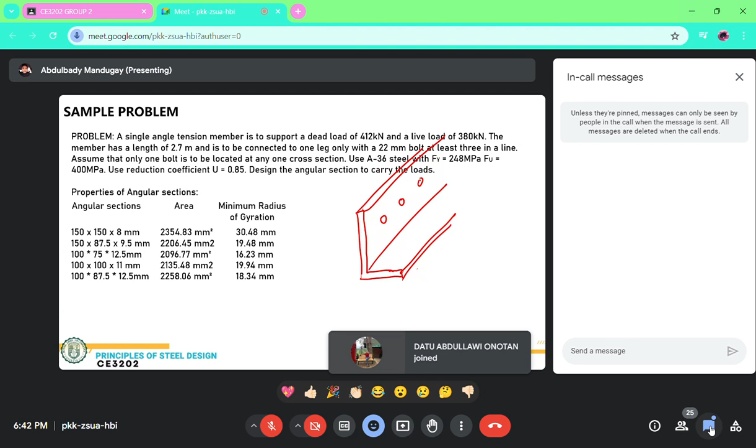With one leg, to one leg only with a 22 mm diameter bolt, at least 3 in a line. Okay, so this is one line, at least 3. So pwedeng 4, pwedeng 5, depende sa atin. Assume that only one bolt is to be located at any one cross-section. So ibig sabihin sa one of the two legs niya lang.

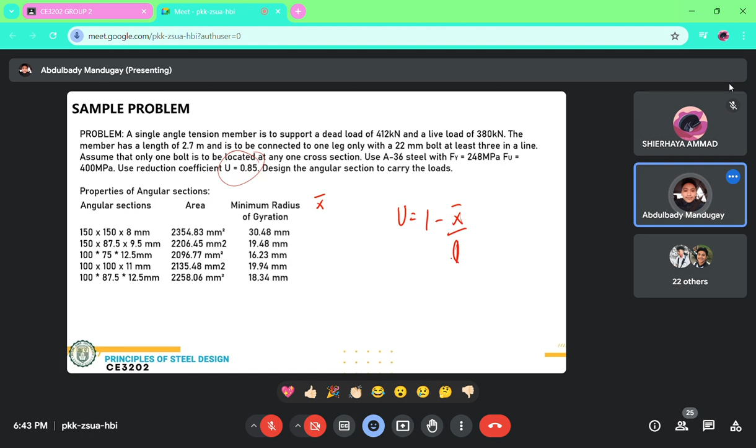Okay, design the angular section to carry the loads. Now, meron tayong choices dito. May different sections. These are all angles. And given ang area nila and given din ang minimum radius of gyration nila. Now, ang task natin is to design the section. Pipili tayo ng section na sufficient mag-carry doon sa given na load.

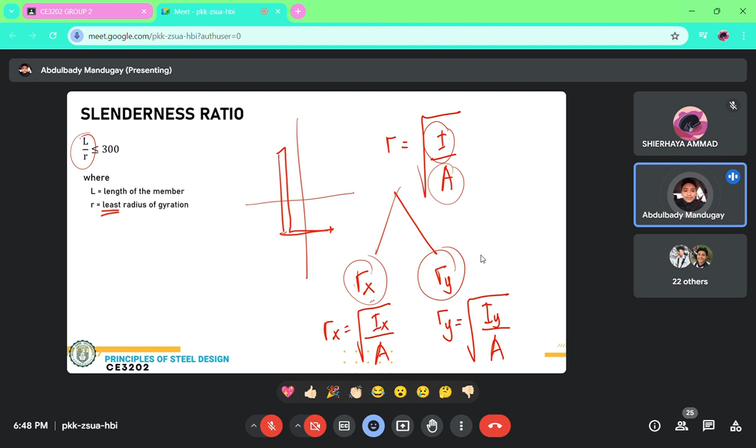So kung radius of gyration about X, this is actually square root of inertia natin about X all over the cross-sectional area. At si radius of gyration natin about Y, this is moment of inertia about Y divided by cross-sectional area. Now, the smaller of the two values, yun yung gagamitin natin dito para malaman natin kung ano yung tinatawag nating critical slenderness ratio, which is dapat hindi siya maglagpas sa 300.

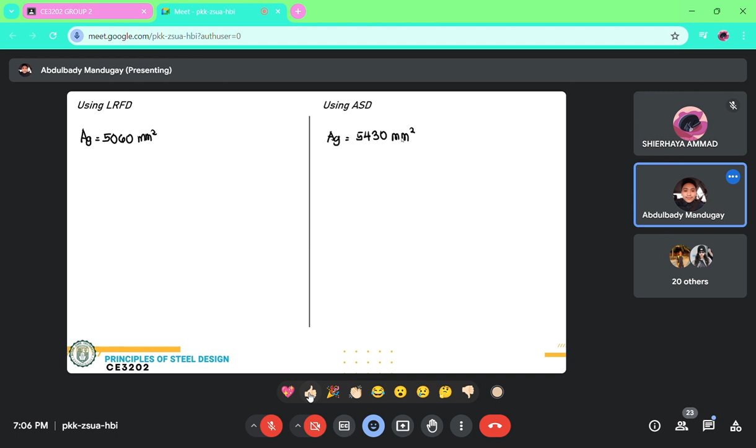So, since ang sabi sa problem is to be connected to one leg only with a 22 mm bolt. Okay, alisin na lang natin yung given na U. Total, nandito na tayo. Para isahan na. Sige. Kunyari walang U, anong gagawin natin? Ang sabi dito is angle siya to be connected on one leg only. So, ibig sabihin, let's say for example, napili natin na leg is the longer leg. Nandito nakakonect yung bolts. Dito siya nakafasten.

So, pagdating sa shear lag factor, if you can still recall, mag-fail na to sa case number 1. Kasi dapat sa case 1 is nakakonect sa lahat ng sections. Sa case 2, pasok siya kasi fastened lang siya on some but not all. Pero may isa pa siyang case kung saan siya pwedeng pasok. That is case number ito. Okay. Pasok siya sa case number 2, which is by formula na 1 minus barred x over L, at pasok din siya dito sa case number 8.

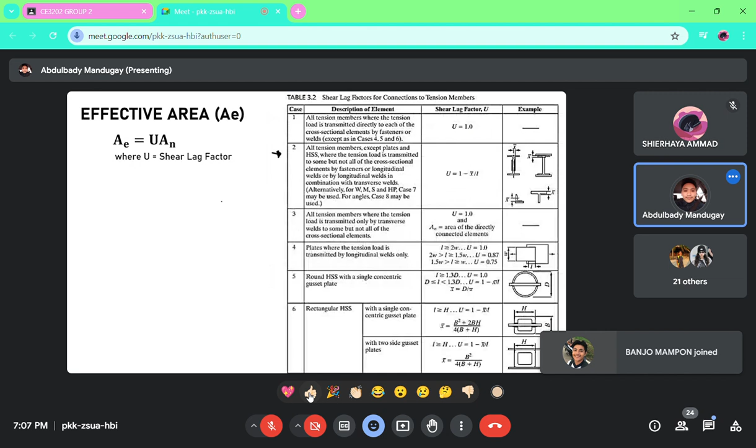So single and double angles, okay, so single angle ito siya, with 4 or more fasteners per line, ang gagamitin natin is 0.8. With 3 fasteners per line, 0.6. Eh, ilang fastener ba to? At least 3. So, pwedeng 3 or more. Okay? So, kung 3 fasteners per line, ang gagamitin natin na U is 0.6, from case number 8.

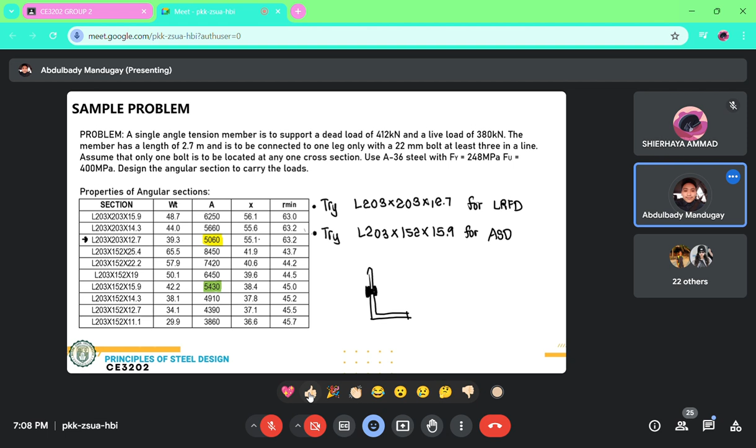But, if ang gagamitin natin is case number 2, isasolve natin yung ating magiging shear lag factor using 1 minus barred x over L. So, ano yung barred x natin? Since ang napili nating section for LRFD is this one, ang barred x natin is 55.1. At ang L natin is wala pa tayong value. Ngayon, for our L, pipili tayo ng spacing. Kung babalikan natin, may spacing tayo na requirements of bolts. Okay, wait lang. Kunin natin ulit.

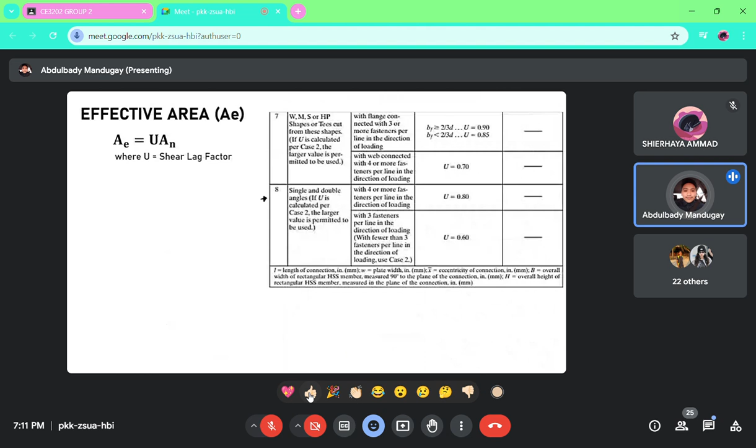Pero since design topic ito siya, free kayo na i-apply kung ano yung gusto nyong specifications. As long as nakasunod kayo sa code na not less than 2 2/3 of the nominal diameter ng bolt, then pwede. Pwede kayong mag 2 2/3 D. Pero 3D is preferred according to the code. So, highly encouraged na 3D kasi mas madali siyang isolve. Yung 2 and 2/3, halos 3 naman din siya. So, 3 times nominal diameter ng bolt. Ang nominal diameter ng bolt natin is 22 mm. So, 22 times 3, that's going to be 66.

Okay. So, preferable lang yung 66. Pero sa actual, 66, masyadong sabog. In mm to siya. So, pwede natin gawing 70 para sarado. Or kung naka-inches siya, pwede ring saradong value ng inches. So, let's just say 70 mm. Again, we are designing. So, may freedom kayo as long as you are considering yung safety, practicality, pati yung aesthetics.

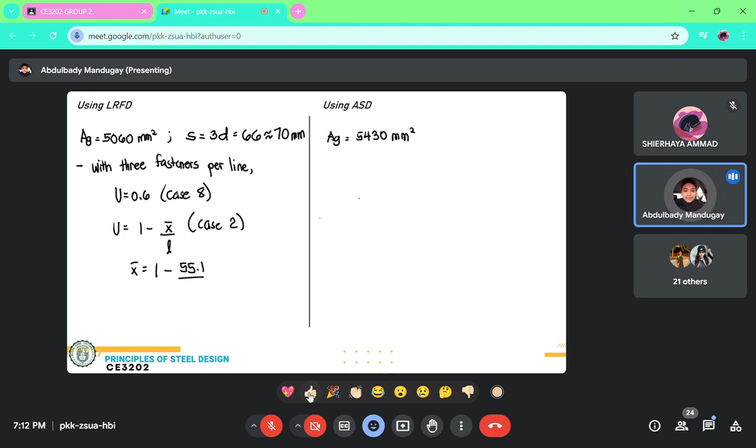Okay, so 70 mm. Kung 70 mm yan, 3 fasteners per line, meaning, kung ito yung longitudinal view ng ating angle, 3 fastener yan. So, kung 3 fastener, that will be dalawang 70. So that's 140. This will be our L value. So divided by 140, that's 0.606 or 0.61. So if meron tayong dalawang value ng U, sabi sa code is piliin kung ano yung mas malaking value. Pero same lang sila halos, di ba? So itong pipiliin natin. Ang magiging U natin is 0.61.

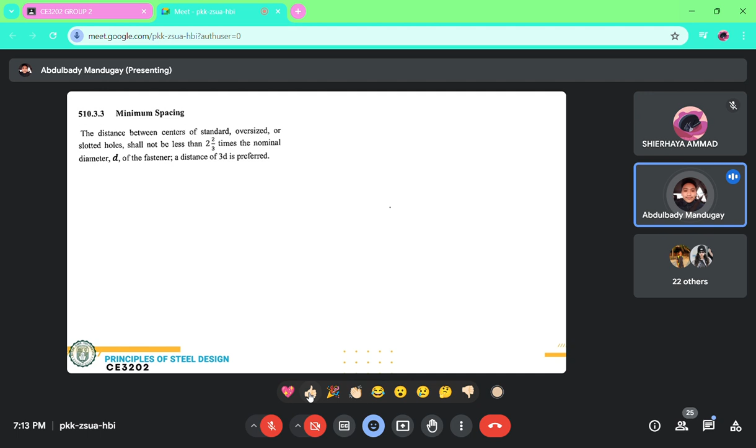Now, this is the same dito sa ASD natin, no? With 3 fasteners per line yung napili natin, tapos on one line lang. So, we have U is equal to 0.61. Okay. So, let's proceed. Meron na tayong spacing. Meron na tayong U. So, net area na tayo. Net area rupture.